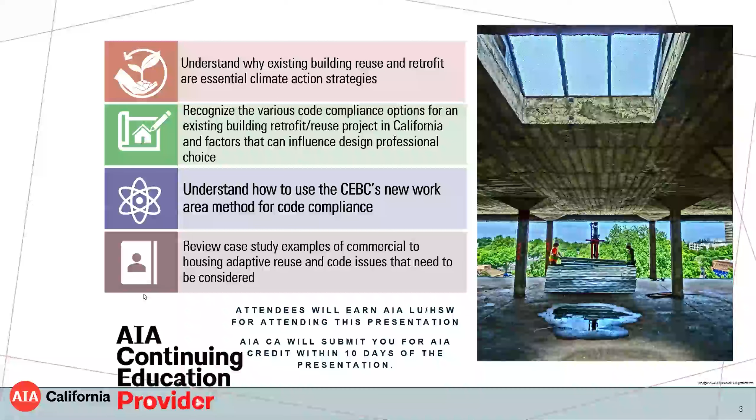Not that I focus just on code, but I've always gotten into the code, and it's kind of exciting to be part of the code development process in the state of California. Sarah mentioned this program will qualify for HSW, and what we're going to do is just talk about buildings and how to intersect the use of existing buildings with code, including some case studies, examples, and I am going to put a particular focus on a brand new approach to the code.

The code is organized, as you all know, to work with by topic, and Ron takes a different view and organizes code issues by the sequence that an architect uses in the creation of design for a building. So it's quite a unique book.

But before I get into the details of the code, I thought this is where a really important conversation starts, the why. And here it's why existing buildings? Why all this attention on existing buildings? Well, they're all around us, obviously, and they do need work.

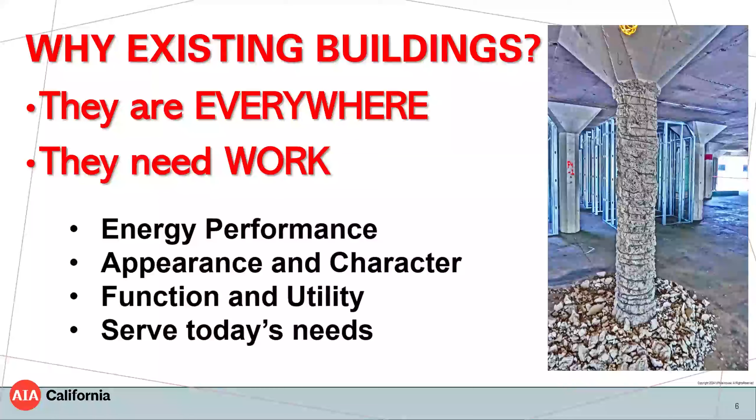They need upgraded energy performance. They often need better appearance and character. And they need to actually serve us for our needs today. We are tearing down a lot of buildings in the United States, 1 billion square feet a year. Oh my gosh. And we have millions of buildings sitting empty.

Meanwhile, the practice of architecture has actually shifted, and we have recently, based on AIA surveys, now crossed the threshold where architects do more renovation work than work on new buildings. And when you look at climate action and our goals and the dates that we're trying to reach, some reduction in greenhouse gases will be significant in preserving our climate as a place for humans to occupy this planet.

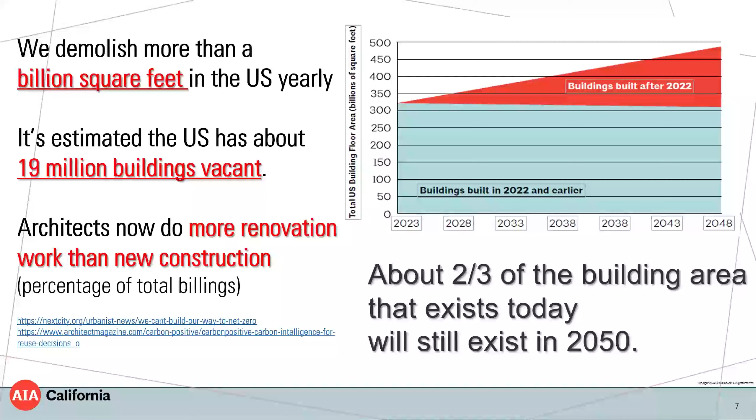The building area that exists today mostly will still exist in 2050. So we have an awful lot of buildings that are unavoidable. Many of you have heard a phrase that Carl Elefante, former AIA president, is widely credited with coming up with, that the greenest building is the one that already exists.

And what that means when you look at what's happening in terms of our climate and the urgency for action, this chart here really shows dramatically how things are changing, and this even more so because this is just from a few weeks ago in our own area, California, where on the 22nd of July, we broke the record for the hottest day on the planet.

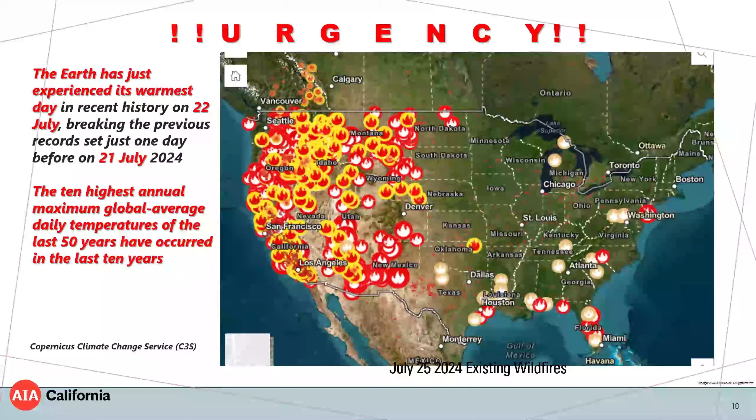And one day before, that was a record-breaking hottest day on the planet. So we're in a situation where there's a crisis and new buildings cannot get us out of this crisis. It's really not possible because we have so many existing buildings. When we tear them down, the embodied carbon emissions from tearing down buildings cannot be recovered for decades.

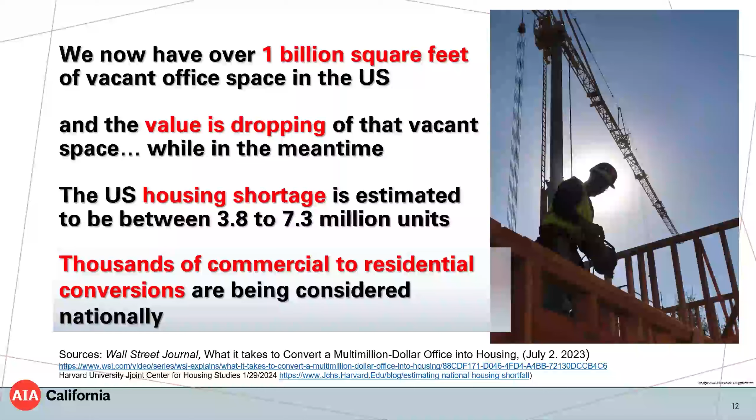At the same time we have this climate crisis unfolding, we have other crises in California and across the country. We have over a billion square feet of vacant office space in the United States, and the value of those buildings is declining. Meantime, we have a housing shortage of millions of units. There's different people coming up with different numbers, but it is millions and millions of needed housing units. And you look at those two things together and they kind of intersect: hey, can't we take some of these underused and empty commercial buildings and make residential uses out of them?

And while those conversations are going on, in the meantime, those of you who are members of AIA know that the whole perspective on our codes has shifted. This Blue Ribbon report that came out in 2019 realized that we have to elevate our thinking about codes as not just preventing buildings from burning and from falling down. We have to consider how they affect the human condition and how they affect the environment. And that new version and vision for codes has been very influential in AIA California, where we have actually brought forward the very first embodied carbon mandatory measures in the United States.

And they're actually in effect right now. They went into effect in July this year. This was a huge four-year effort, just like the changes to the existing building code. And I was proud to play a role in making both of these major code changes. If you looked at the details of how these embodied carbon reduction measures apply, there is a big emphasis on reusing our existing buildings.

So let's take this kind of soup, this mix of issues, all of which are occurring at the same time, and try and pull some multidimensional solutions together, because given the number of issues we face as a state, we do have to look at it multidimensionally.

So let's look at the options for a real project. I assume many on this call are architects working on real buildings, so what are your choices? Many of you may know these already, but I'm going to cover the full landscape.

You have the California Building Code and the California Residential Code for certain kinds of projects: 1 to 2 dwelling units, townhouses, live-work, lodging. You have the Historic Building Code, which works in conjunction with the CEBC. And you have the California Existing Building Code.

That code has 3 different compliance paths you can choose from, 2 of which have been in place since that code came out. Many of you know that the California Existing Building Code used to be in the California Building Code as Chapter 34. It split off a number of years ago to be a separate freestanding code. 2 of those methods have been in the California Existing Building Code from the beginning. Another one is brand new.

That's the work area method. We're going to talk about all these different approaches here today, some of them a little bit and some of them in more depth.

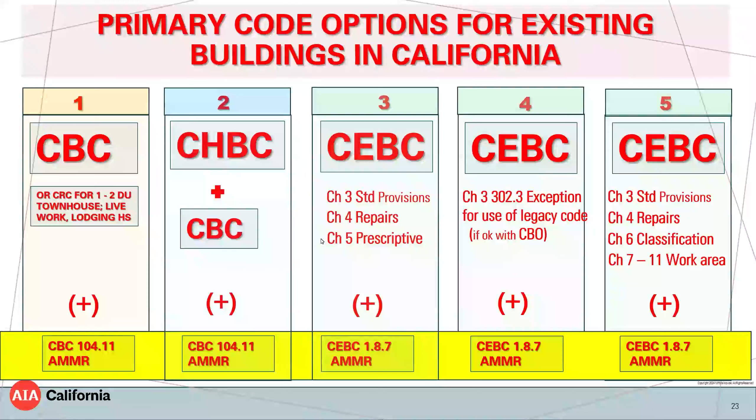Now you notice on the bottom of my little chart here, I say plus AMMR. AMMRs exist as a potential in all of the California codes. Some may not know what I mean when I say AMMR. AMMR is an alternate materials and methods request. It's like a performance code provision in these codes, which are essentially prescriptive codes.

And AMMR, in terms of its structure, has 3 parts. First, what does the code say you're supposed to do? Second, what is the intent of that provision? And third, how does your proposed design accomplish that intent, even though it may not meet the letter of the code itself? For those of you who want more background, all these links are going to be available.

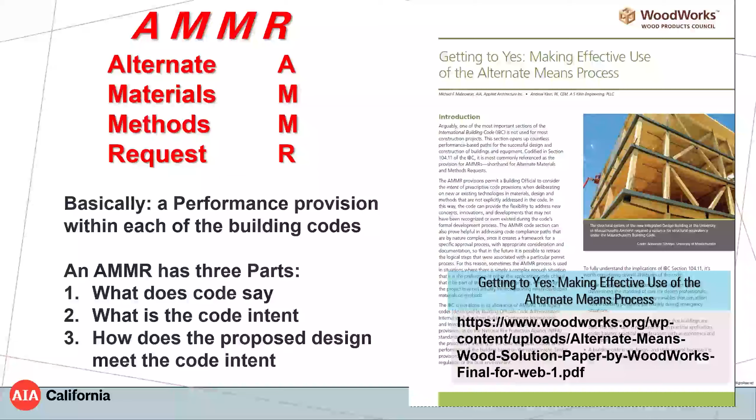As a separate document that's going to be shared with attendees or made available as a link that you can follow up, and Sarah may post it in the chat. But don't worry about copying down these links. This is a white paper that I helped write about using the AMMR process.

Now, I mentioned the existing building code. When you look at the existing building code at the national level, there's a whole chapter that's a performance code chapter in the IEBC, and it creates an entirely different code compliance path.

Now, here in California, that chapter has not been published or adopted until July of this year. As part of our major progress in the intervening cycle, thanks to the hard work of the State Fire Marshal and a lot of volunteers and different agencies, this is now published in California, but not adopted. It is available for adoption in local jurisdictions. I know of one that's potentially thinking about it, but it's a pretty complicated chapter.

Those of you who know the material, because it used to be in California codes, published and not adopted in Chapter 34 - this is unique. It's a unique code because it's based on a point system.

So it tries to bring an objective foundation to how you evaluate life safety. You analyze a building using Chapter 13, and for deficiencies you assign negative points, then you get positive points to balance the negative by life safety enhancements. You have to meet a score that's in a table over 23 measures. By the way, in my slide deck, when you see this little bullseye, that's kind of what I think is a special point.

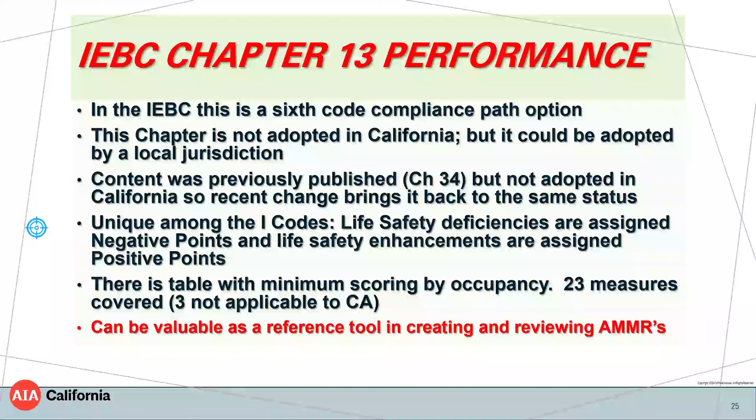In the point system in Chapter 13, it really only covers 3 categories: fire safety, egress, and general safety. So the rest of the kinds of issues that you have to deal with in a building are covered by other codes or other parts of the existing building code. Again, we don't have this available yet in California, but it is available for local adoption, and it's certainly available for reference.

I looked at these numbers and they didn't make sense to me. So I inquired at the ICC and was informed that I would have to talk to the people on the committee that developed this table. That was done so long ago that it's been in place for decades, and so far I haven't gotten any explanation.

The way points are assigned, both negative and positive, there's a lot of variables based on the occupancy. So what I'm warning you is, do not argue to your code official that because the B occupancy for means of egress requires 40 points, it means it has a higher requirement than R occupancy, which has 38. You can't use it that way, unfortunately. It would be great if you could, but you can't.

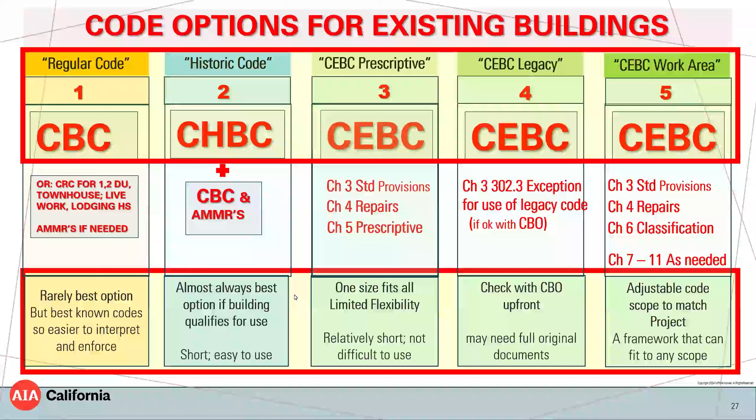And frankly, it's going to get better because that code development committee has just been rebooted, and I believe it's going to even improve more and be more effective.

Then you have the California Existing Building Code. Now you see that listed in 3 columns, because that code, again unique among codes, gives you a choice. I have to tell you the story. When we were in the process of getting the work area method brought to California, which was a 4-year effort, because it involves 6 chapters, how do you bring 6 chapters all in one fell swoop to a code through the typical code development process? Not an easy lift. And unfortunately, they all had to be brought in at the same time because it requires all 6 of those chapters to be functional.

One of the concerns raised to me along the way was from an architect who said, Mike, why are you going to add another code book to my shelf? It just makes it more complicated for us. I told them, you're misunderstanding. These are choices. And guess who gets to make the choice of which of these compliance paths, 3, 4, or 5, you're going to use on a particular project? You, the architect, chooses, not the building official, not the building owner. The architect chooses. And if you choose number 3, then you're not worrying about 4 or 5. If you choose number 5, you're not worrying about 3 or 4. Although the way the chapters are written, there are chapters that apply no matter what you do.

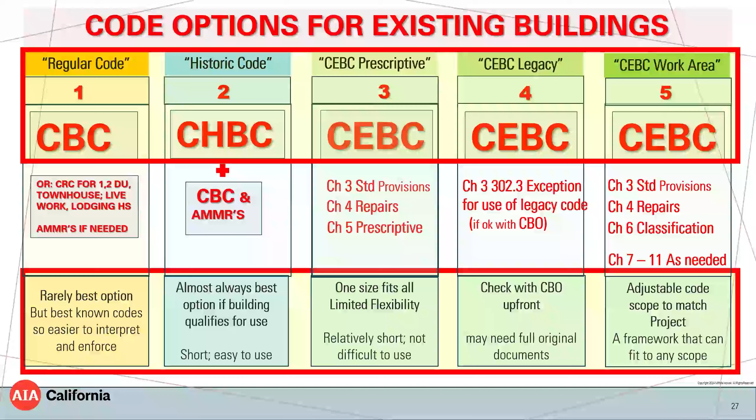I'm going to talk about all 3 of these. But first, let me start at the beginning, the California Building Code.

I just want to make sure you know that it says you can use this code for replacement, repair, enlargement, alteration of existing buildings. If you're taking a project that involves an existing building that you are totally gutting - taking the skin off, gutting the contents, just left with the structural framework - well, you might as well use the California Building Code because everything in that building is literally going to be new and the structure is readily accessible. There may be structural issues that you cannot resolve easily, but there are times when there's not going to be a huge difference, though it's pretty rare, I think.

Now, I've mentioned the California Residential Code. You know that its language also says it can be used for alterations. Usually that code only allows use for 1 and 2 family dwellings and townhouses, not more than 3 stories in height. But California Building Code says the live work units can use the California Residential Code.

And I can tell you one major jurisdiction, the city of LA, is really making great use of this live work provision. They have a whole chapter in their municipal code. For those of you who don't live in LA, sorry, you don't get to use this, but chapter 85 has some really great stuff in it. And it's being revisited now - it's the adaptive reuse ordinance that's under what they're calling version 2.

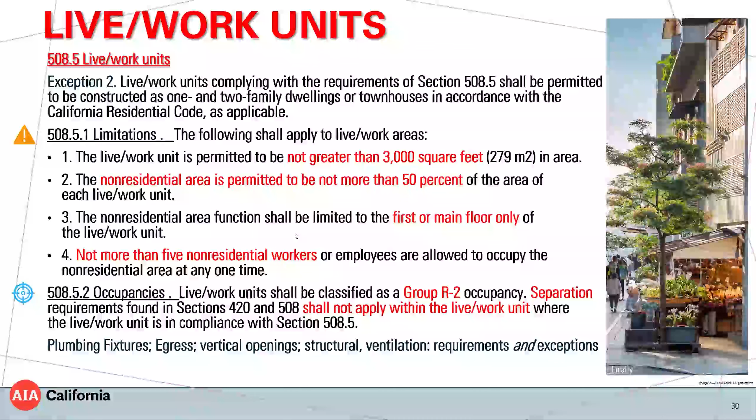It allows you to use the CRC, but then it says that you need to classify it as a group R2 occupancy, which normally isn't covered by the residential code. But you don't have to put in separations - there are some other things covered by that. And again, in the city of LA, they've really taken this to a very high level.

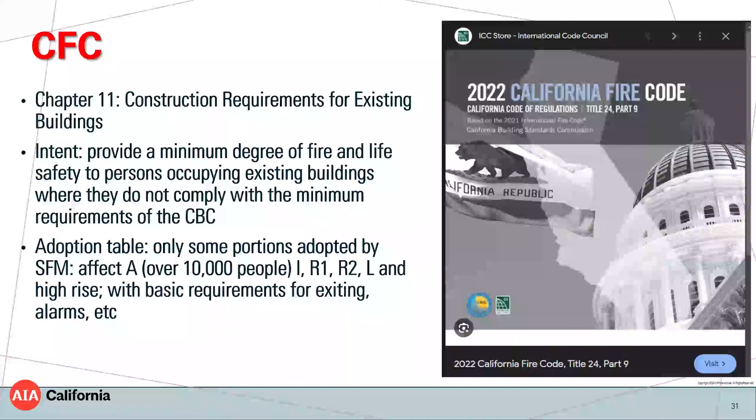California Fire Code is not necessarily a code that architects spend a lot of time with. It is the only code that really applies to existing buildings - Chapter 11. The inspections that fire departments do of an existing building, they're looking for things in Chapter 11. The adoption table is important here because this chapter only affects certain kinds of occupancies - R1, R2, A occupancies over 10,000 people, high rises - and it has basic requirements similar to what's in the housing law.

Let's move now to the California State Historic Building Code. This code is used for qualified historic buildings. Now, what is a qualified historic building? That's a building, and there's a definition in there - it's a subset of all buildings.

It is used at the discretion of the owner, and for design professionals, that means it's up to you. In other words, the use of this code has to be opted into by the design professional. So you have to identify its use on your construction documents, make it really clear in your code analysis - this is the code you're referencing. If you opt to use it, the state agencies and the local jurisdiction have to accept it.

It is easy to understand and apply. It's written in a conversational style that many will find like, oh wow, this is a code I can actually sit down and read - which unfortunately means that there can be variations in how it's interpreted by local jurisdictions. I'm going to tell you, though, that this code has a unique element in it that can overcome this variation in local interpretation. Like in any code, whenever I'm looking at a code, I always check the definitions.

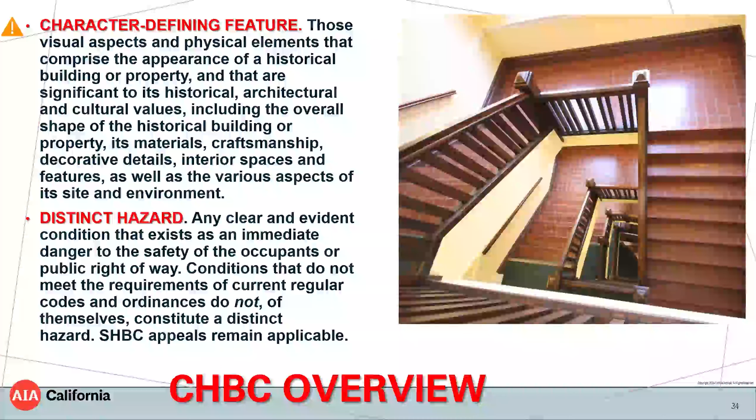This is a major issue, and it clarifies in the code that just because something doesn't meet regular current code, or doesn't meet a local ordinance, that does not itself mean something is a distinct hazard. That's an appealable determination as well, and I'm going to show you how that works in just a minute.

The CHBC is applicable to all issues regarding code compliance, but what's unique about it is it's not a complete code by itself—it has to be used in conjunction with the regular code, the California Building Code. There is a mandate that it be used by agencies whenever it's the code selected by the design professional, the owner, and the building qualifies.

It does allow buildings to be expanded, with non-historical expansion or addition, when those conform to the requirements of the regular code. They also cannot detract from the historic substance of the building. In other words, you can't wreck a building with an addition to make it non-historic, which makes sense.

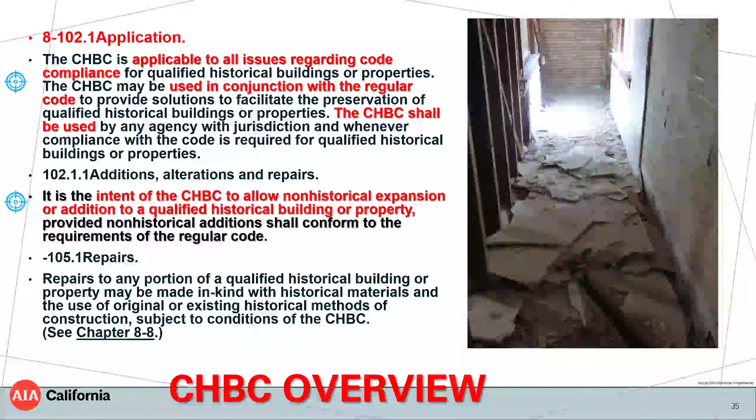Repairs can be in kind. That can be a little tricky to navigate, as many practicing architects know, because materials might not be available, or they may have changed—like the dimension of a 2x4 has changed significantly over the years. So one made today is not necessarily going to be the same strength as one cut in 1930, but these are things that can be overcome.

Building use can remain regardless of the time when it's been unoccupied. Some people think there's a rule of thumb that if a building is abandoned and empty for 40 years, it loses its ability to reestablish the original use. That's not true—that's written right in the code.

Changes of occupancy do not mandate conformance with new construction. That's a big one for architects, and it's stated as clearly as I've put it here. Check it out, 8-302.2—a really great tool, especially for the kind of project that AIA California is very excited about: commercial to housing adaptive reuse.

Some of the other cool things in this feature: you're unlimited in floor area. Once you sprinkler a building, most of the required separations get either omitted or can be reduced to one hour, and many can simply be omitted due to the fire sprinkler, the active fire protection.

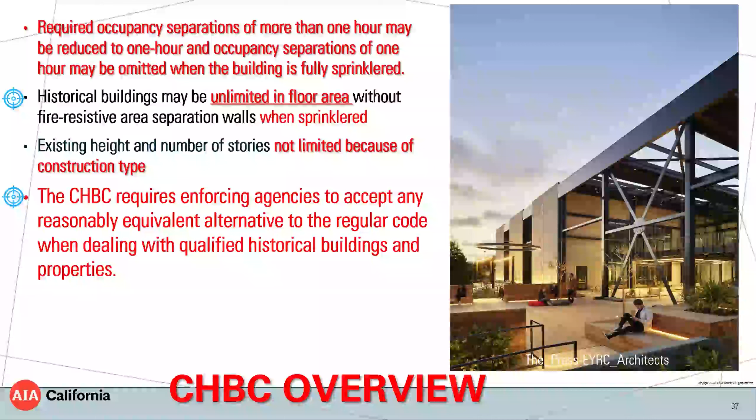You're not limited in terms of construction type to any particular height or number of stories, because if a building was built and it's been that way, it can remain so. There's a statement that the CHBC requires enforcing agencies to accept any reasonable equivalent alternative to the regular code. I mean, how great is that?

The way structure is dealt with in this code allows you to use a lower factor - this 3/4 factor in checking wind and lateral loads historically. You can also use this assumed adequacy when you have gravity loads that you can demonstrate have a complete load path and there's no evidence of distress. So the test of time has merit in terms of applying the historic code for gravity.

Those of you who are new to this code, I highly encourage you to go to the Department of General Services, Division of the State Architect resources page. DSA is sort of the custodian of this code, and they manage the code committee that adopts and maintains it.

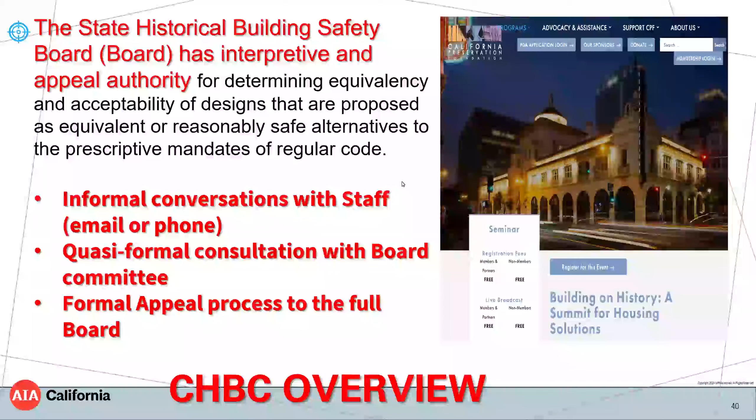Okay, we're going to change gears now and talk about a different code. Remember when I said there were 5 different approaches? We've talked about 2 of them. The other 3 all come from the California Existing Building Code.

One of the 3 paths is brand new - it's the work area method, effective as of just a few weeks ago, July of this year. That's due to a concerted effort undertaken on behalf of AIA California, involving a lot of people from all over the state, code experts, fire officials and building officials from up and down the state. Very proud of the progress we made bringing this to the table.

The philosophy of the California Existing Building Code now follows the logic used to create the International Existing Building Code - a progression of code compliance that becomes more strict as a project moves between different levels. It goes from repair, to 3 levels of alteration which I'll describe - this is a little confusing - to change of use and additions. By the time you get to additions, pretty much, not 100%, but pretty much meet current code.

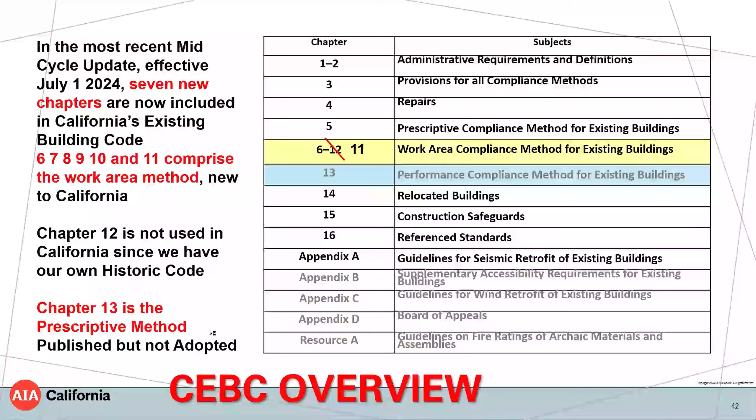That's the point when my presentation crashes - apologies for that. I don't know why it was doing that earlier, but I'm going to have to go back to where I was, which is this slide right here. Sorry about that.

So if you look at the California Existing Building Code from the table of contents standpoint, you find it has a bunch of chapters in it. Chapter 12 is not adopted in California - we have a whole separate Historic Building Code, which is what I've been talking about for the last 15 or 20 minutes. Chapter 13 I have in orange because it's printed but not adopted - it is very useful as a reference. You have the prescriptive compliance path that's been in place in California since this code became part of our code landscape.

That still exists, but now we have this additional work area. Now I drew a yellow line.

Every project is going to involve chapters 1, 2, and 3. Anytime you have a project using the California Existing Building Code, you are going to be using chapters 1, 2, and 3. Most projects, no matter which compliance path you use, are going to be using chapter 4. Chapter 5 is only used if you choose the prescriptive compliance path, and chapters 6 through 11 are only applicable if you use the work area compliance path. And which of those chapters is applicable depends on what exactly you're doing in your project.

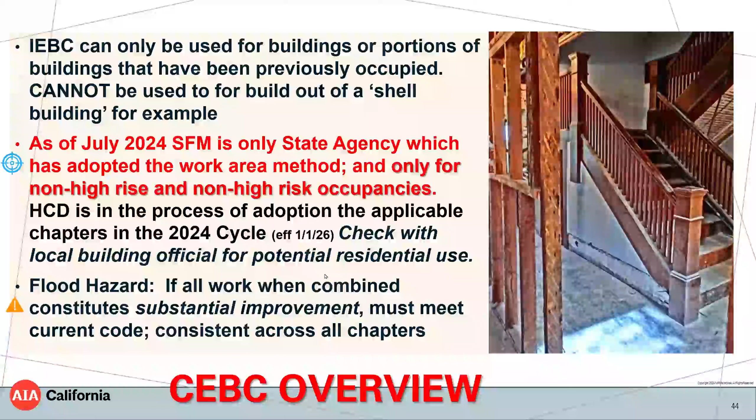The other thing I'm noting here, and I have a little triangle with the exclamation point, flood hazard. Flood hazard requirements are the same no matter what compliance approach you use. And when you do substantial improvements, you must meet the flood level elevation for the area. That's consistent across all chapters, and that's basically meeting current code. So be careful if you're in a flood hazard area, because those standards do not depend on what compliance path you choose.

So as I mentioned, all projects are going to use chapters 1, 2, and 3. Most projects are also going to use chapter 4, because most projects involving an existing building have some degree of repair. And you don't have to cite repairs in your code analysis necessarily, although I do think it's helpful to a code official if you make it clear, and you can do that with a narrative scope.

One reason to do that is because, as you'll see as we get into the details here, those provisions are pretty loose, pretty flexible, and pretty workable, pretty easy to understand as well, and pretty easy to apply, with a couple of rubs that you might get into that I'll mention, like dimensional lumber being different, so you may have to show that the lumber you're using has equivalent strength to the lumber that was used historically.

So let's talk about chapter 1. That's the basic nuts and bolts that define the scope. So what is this code for?

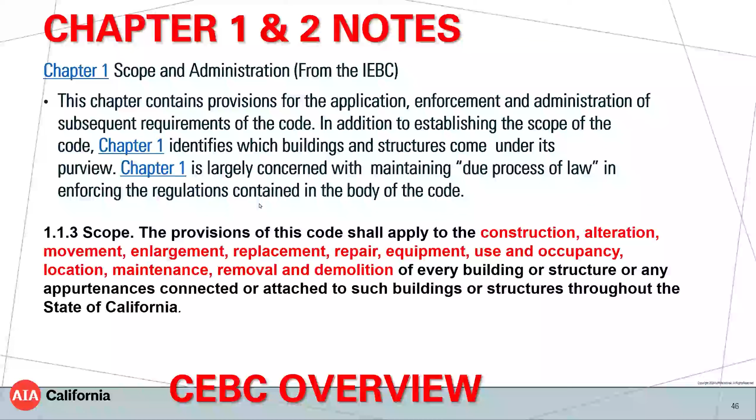And this isn't a chapter most architects are going to spend much time with. It's about the due process of law. But like all the codes in California, the adoption tables are part of the code landscape.

And I know most architects, many building officials cringe over the adoption tables because it's this alphabet soup of state agencies and different adoptions. And what you find is state agency adoption process can lead to different language for the exact same issue. Now, here's an example from the adopted California Existing Building Code.

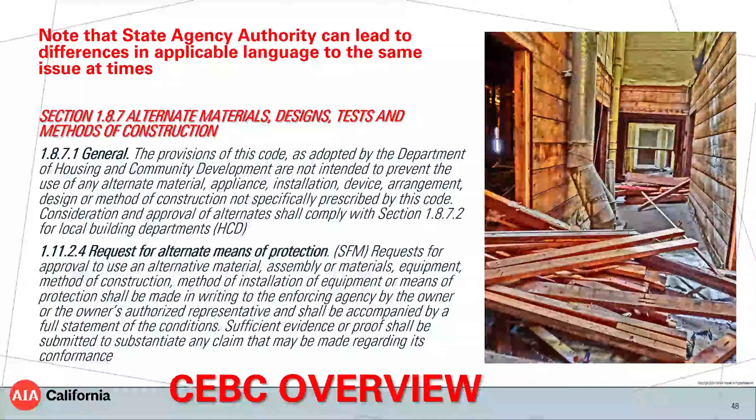One adoption by HCD and one adoption by SFM. They're pretty much exactly the same in terms of the outcome. Why do they use different words? I'm not sure. Maybe there's some logic there. Maybe that's just how it played out. It just creates baggage when the same thing is accomplished with different words.

It makes the code bulkier. Hopefully at some point there is some effort to do some cleanup, but everybody's busy all the time, also in the state agencies. So unless a topic comes up as part of an adoption, making the code more lean and easy to use usually isn't necessarily a main driver of code change. I like this one. So here's a few things that I think are cool for architects.

104.2.2 basically tells the code official shall meet with the permit applicant prior to the application for certain kinds of work. This doesn't say may meet or could meet or hopefully will meet. It says they shall meet. It is a mandate. Now many building officials want to meet with you early in the process, and really smart building departments, in my view, offer pre-development meetings at no cost because it saves everyone, including the building department, time and money.

But there are not any equivalent requirements that I'm aware of in other codes, and I would encourage architects to take advantage of this. If you ever get pushback, say hey, check out 104.2.2. You have to meet with me, unless it's just a repair or level 1 alteration. Those projects, I guess, are considered simple enough. They're beneath the mandate of this clause.

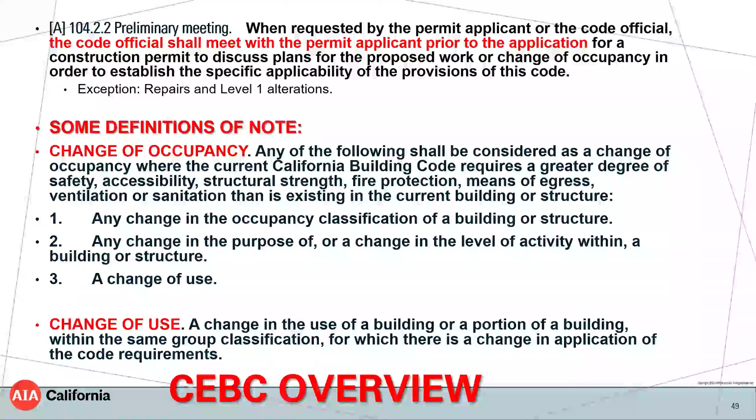Change of occupancy. What is a change of occupancy? I know you all intuitively know what a change of occupancy is. Unfortunately, it's complicated, more complicated than you think. It's more than just changing what letter and number is assigned to the occupancy by the CEBC. It's about how a building is used, the level of activity, and you may be in the same occupancy classification. So there is a distinction in the California Existing Building Code and in the IEBC between change of occupancy classification versus change of occupancy, which is a much broader envelope. I know it takes a little while to get your head around, but it's a real thing and you need to be aware of it.

It isn't always going to come up, but it can come up. Some other terms that seem like they might have intuitive meaning, but they don't. They have very specific meaning.

What is an incidental structural change? Just remember 5%, 5% is incidental. What's a minor structural change? 10%, 10% is minor. What's a major structural change? Anything that isn't 5 or 10%. If it's 11%, it's major. If it's 22%, it's major. But if you just remember, incidental means 5%, minor means 10%, major is everything else. And those numbers, you'll see them popping up in other places in the code, just like the 75% you already saw in the State Historic Building Code.

Here's a couple other definitions that I thought were important. Substantial. There's a difference between major and substantial. Substantial means the cumulative impact over a 5-year period of alterations that affect the structure's ability to serve its intended purpose. And that's 30%. So substantial is 30% over a longer period of time.

Some may wonder, what is BS here? And it isn't the pejorative BS. Why are these bracketed terms in here? For those of you who aren't aware, that's a reference to the code committee at the I-code level that is assigned to this definition, because each part of the code is assigned to a different committee. Sometimes in the same chapter it's broken up into parts and pieces, and definitions are assigned all over the map. So they're of really little relevance to California unless you're trying to make a code change at the national level. But that's what those mean. Those are not state designations.

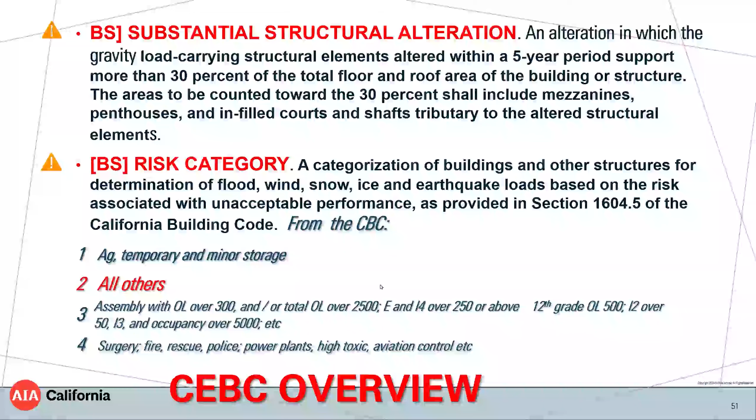Risk category is a very important terminology, and this is based on the CBC section 1604. There are 4 structural risk categories. This is about the category of determination of loads from flood, wind, snow, ice, and earthquake based on unacceptable performance. Almost all buildings are risk category 2. If it's ag, minor storage, or temporary, it's a lower risk category. And if it's high occupancy assembly use, or education, or institutional occupancies, or school occupancies, or surgery, fire, rescue, police, power plants, toxic plants, aviation control, those are higher risk categories. Those are important to know because that's what often triggers the need for a structural upgrade. And fortunately, chapter 16, most buildings are in category 2.

What does technically infeasible mean? Again, I know you all intuitively know what that means, but I'm telling you there's a definition of it, and it's based on structure being in the way of allowing something to happen, or site constraints—like you cannot add a normal second exit because the building is built to the property line on 3 sides, and it's too narrow to meet the requirements for diagonal distance. So maybe there's a constraint that allows you to use a fire escape instead.

It's about things that you cannot change reasonably, like load-bearing members that are essential to the structural frame.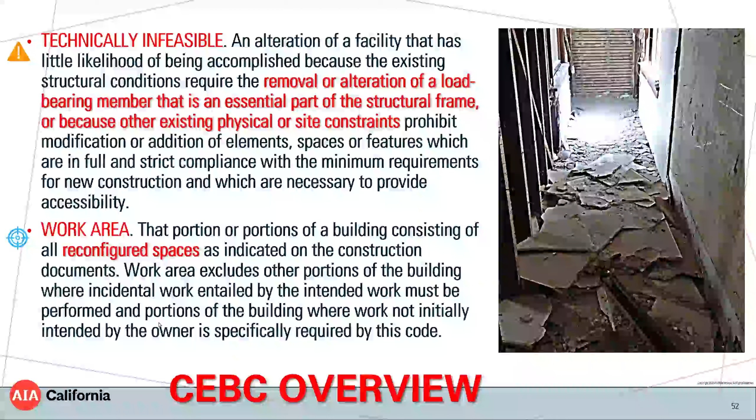Another big term is work area. That's one of the most confusing parts of the International Existing Building Code and the California Existing Building Code, so I'll spend a little more time on it. The written definition is reconfigured spaces as indicated on the construction documents. Yes, architects, you do have to show where the work area is on your plans - it's actually a code requirement. It excludes other portions of the building with incidental work that's triggered, like accessibility, not because an owner is doing something to further their plan for the building, but because of some code trigger. That's the way it's worded: work performed where it was not initially intended by the owner, specifically, and when it's triggered by code.

Give you a breath - I'm taking a breath before we get into chapter 3. We're about halfway through. I know it's a long haul. Hang with me for a minute, we'll get through this together.

Okay, chapter 3 applies to every single project that uses the CEBC. So if you put on your cover sheet that you are using the CEBC, it doesn't matter which compliance path you choose, you need to look at chapter 3 because it applies to your project. Of note: you cannot mix compliance paths on the same project. You cannot use the work area approach for this story and the prescriptive approach for that story. No, it's one or the other because it's a whole package process.

But there is this weird exception, 301.3. Remember I said at the beginning there were 3 compliance paths? This exception is viewed by the ICC and the experts on the existing building code, and referenced in all the code materials, as a compliance path. What this exception says is alterations can comply with the laws in existence at the time the building was built. If you make alterations conforming to those laws, they comply with the code. If you put in new structural members, they need to comply with current code. But when you replace a structural member or make alterations, you can use the laws in existence at the time the building was built. Now, what this also says is it's subject to the approval of the code official.

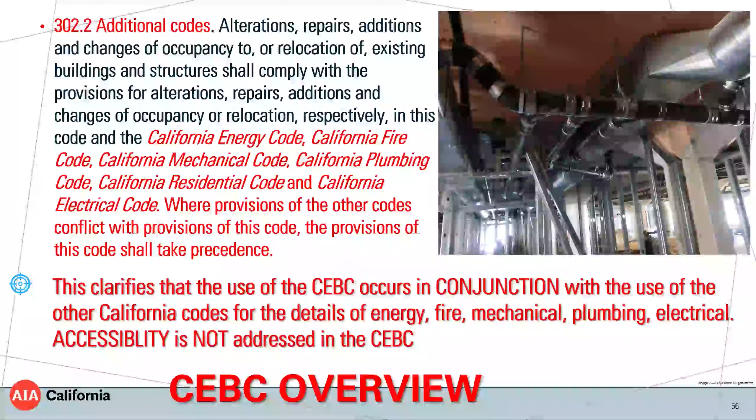This just clarifies that those parts and pieces form the whole. Existing materials are covered in 302.3. You can leave them in place unless they're unsafe. So if you have glass that's not tempered and it's a hazard, the code official can still ask you to replace that, even though it was put in originally. But most things do not fall into the category of being a hazard.

New and replacement materials: you are permitted to use the requirements of new code, and you can use materials that are the same as what was done originally, provided you don't create an unsafe condition. And you can't use hazardous materials where the new code would not permit their use. Safety glazing is one example.

I mentioned, you may find that when you're doing a fire repair, your code plan reviewer says, hey, you can't replace a 2x4 with a 2x4 because these 2x4s from 1920 are not the same as 2x4s from 2024. It's true. So you may have to either make the size larger, or do an analysis to show what an equivalency is.

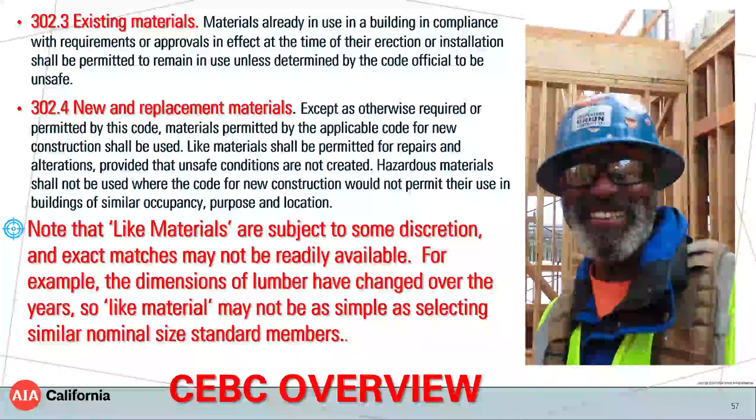And again, that doesn't always get raised. It can get raised if something looks pretty sketchy. It can also get raised as a matter of course. It's going to depend on the plan review. I have had that question brought up.

Section 304 talks about loads. If your project does not increase the design live load, the existing gravity structural elements can be designed for the live loads that were part of the building's original design. So you can actually go back and see what was permitted and continue to use those loads. If you do increase the live loads, then you have to account for that according to the regular code.

This potential to inherit a vintage live load, if you don't change the loading, is important because it can allow you to leave a lot of the structure intact. When you look at really old buildings—some examples I'll show later—like a concrete building built in 1915, the floor was reinforced with wire mesh unlike anything you'd see in the marketplace today. It was strung like in a shallow parabolic curve.

How do you evaluate some of the materials that were used? But again, if it's been carrying the load, it was a storage occupancy. The original loading design was for 100 pounds per square foot. So that building can continue to carry 100 pounds per square foot as long as the floors are not showing evidence of distress, just like the state historic building code allows you to inherit finished live loads as well.

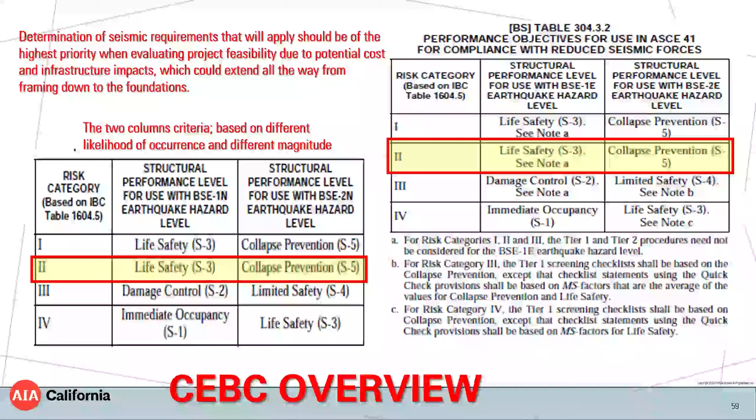Determinations of what seismic requirements are going to have a big impact on project feasibility, so this is something that has to be looked at early. The requirements are based on two sets of criteria and two different kinds of events: a bigger event that's less likely to happen, and a smaller event that's more likely to happen. Each of these has to meet a different level of requirements.

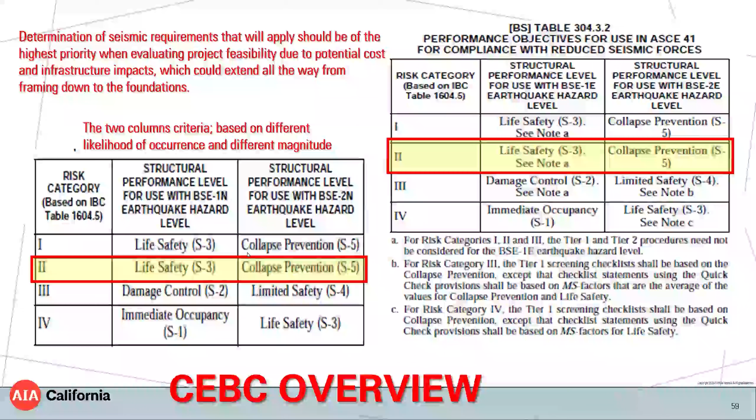So you have this BSE-1E event, and you have a BSE-2E event. This event needs to meet a structural performance of collapse prevention. This event needs to meet a structural performance of life safety, S3. S4 is not used—they skip it here unless you're in risk category 3, which references S4, a higher risk category. Most buildings, again, are in risk category 2. You note that risk category 1 and 2 have the same performance requirements, even though they're different risk categories.

When you're working with existing buildings, you get to use that 75% of new load provision found in the state historic building code, and that's a big help. I am told by engineers that they have to check both of these, and sometimes one controls and sometimes another, just like with lateral loads, sometimes wind controls, sometimes seismic. The basic idea is you have an event with a 10% probability in 50 years, and another event that's 2% probability in 50 years, and they are different magnitude.

You also have things triggered, like bracing masonry parapets. You have a cantilever, unreinforced masonry wall. Those things have to be upgraded, and many architects and engineers will want to do those things whether or not there's a specific code trigger, just because they're such high hazard - they affect the public because these elements fall into the street. They're relatively easy to fix.

Section 317 requires seismic evaluation and retrofit for state-owned structures. Just a warning, some local building departments have adopted these. The city of Sacramento, where I do most of my work, has adopted these to apply to privately owned buildings. This clause is a major deal. It has 5 triggers: a construction cost trigger, a change in risk category trigger, a modification to structural elements trigger, a structural item disrepair trigger, and a change in design loading trigger.

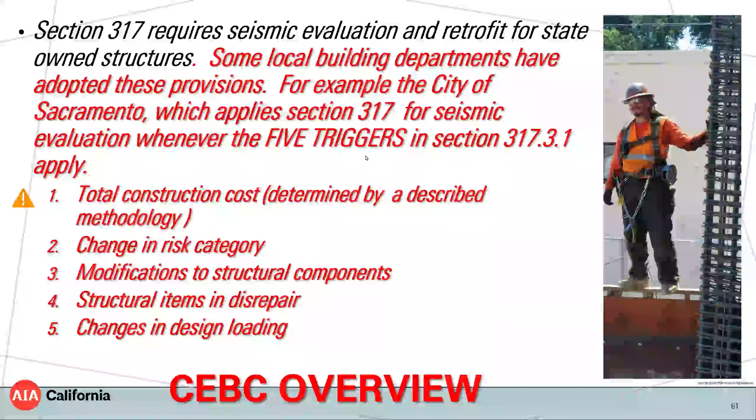Your community may not have adopted this. I hope that at some point the city of Sacramento rethinks its adoption of it, because it's a pretty onerous set of standards. And it is not part of state code, other than for state-owned buildings.

Section 317 - I point out here that let's say you do the analysis and you find out that the building doesn't conform, which, as I said, is going to be the case for any building that's a decade or more old, probably. Again, I'm not a structural engineer, but that's what I'm told by structural engineers.

There's actually 2 outcomes of that for the project. One is fix it. The other one, interestingly, is provide a plan. The plan has to be acceptable to the building official, and the retrofit has to happen in a timely manner. Timely is a term not defined in the code, and that's up to the building official. But that can be really helpful.

You may have a project where it lends itself to phasing. Maybe there's some future activity that's going to allow better access to the parts of the building that have to be accessed to perform the upgrade, or maybe it's a temporary use. But anyway, it's 2 things that are defined as appropriate steps.

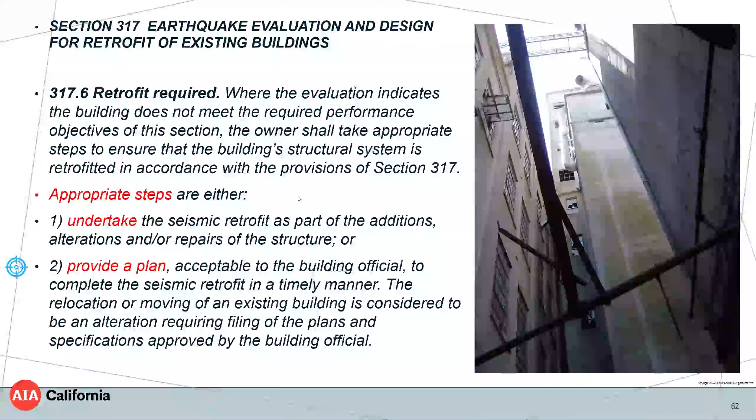Now let's go to chapter 4. Are you guys all still with me? We've kind of moved into the home stretch here, so hang in there. By the way, there's a reduced size version of this presentation that will be available. I don't think anybody wants to go through all 150 slides or whatever this whole deck is, so I picked the best decks. You don't need to write stuff down, you're going to get the key things. Tables and that sort of thing will be made available to you. You just have to email the AIA to get a link.

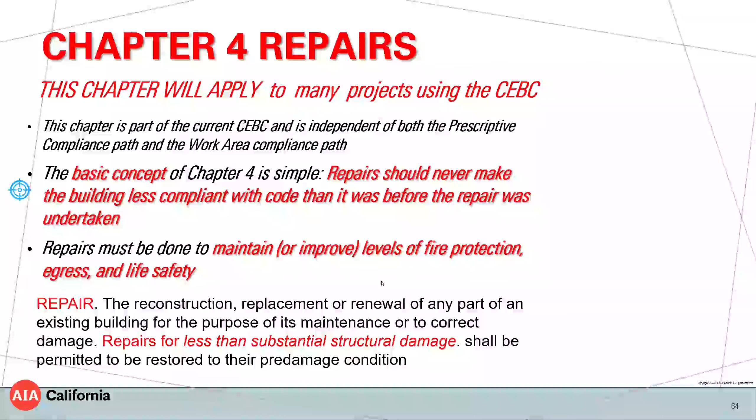And you can, for repairs, go back to the pre-damage condition when the repair is for less than substantial structural damage. You just go back to the way it was before. And remember, that's a defined term, right? Remember I flagged that earlier? So if you're in a case like this, where the structure is part of the beauty and the character of the room, that's pretty darn important, right?

I'm not going to talk a lot about chapter 5 because that's been in the code, and actually one of my friends who's an architect, but far more of a code expert than I am - that's pretty much his thing, he's an in-house code consultant for an architectural firm - he said, Mike, I've gone through the work area method and the prescriptive method. I'm not seeing a lot of difference in the outcome. There is a little bit, but not much.

So whatever you've been able to do under the prescriptive method, you'll be able to do that under the work area method. You're going to have more latitude though in terms of how far that work scope is going to extend, in terms of how much of the building you have to touch, and there are some other things that you may not have to do at all.

Chapter 5 was adopted, I believe, by California because it's pretty simple. Everything's in one chapter, and they just have sections of that one chapter to talk about things like change of occupancy, windows and emergency escape, fire escapes, alterations.

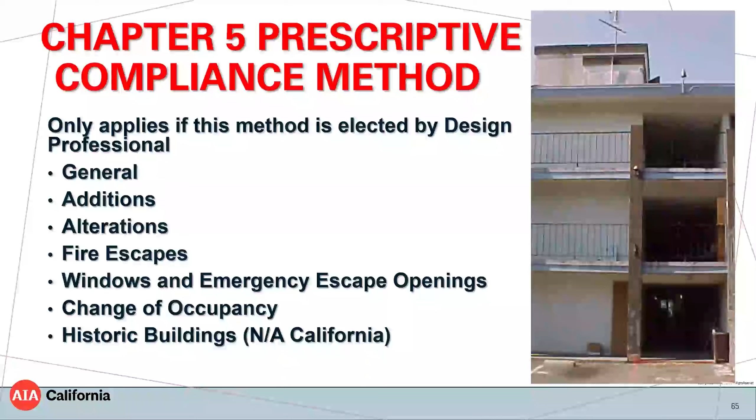You elect this method. As of July, you probably didn't have to say I want to use the prescriptive method - it was really the only method other than that one unusual exception method that's rarely used. Most aren't even aware that it exists. Now you're going to really have to say, yeah, I'm going to use prescriptive. If you know this and you want to continue using it, it hasn't changed at all.

One of the things you'll notice in the prescriptive chapter, that's also in the work area method, is this weird paragraph. When I first saw this, I thought, what the heck is this saying? If you put in a sprinkler system, you can use the current code for fire resistance ratings, but the code official can require you to provide this extensive set of reports and data and investigation to justify using the current code.

Why is this paragraph there? That's because of how codes have evolved over the years. It wasn't that long ago that open offices were kind of a novelty, but as changes have occurred in how we use buildings and the geometry of them, the way the code's used has changed. In California, virtually every building is sprinklered now, and there are things that don't have to be fire rated, like hallways, that used to have to be fire rated as corridors.

So what this is basically saying is, if you fire sprinkler, some of the things that were allowed by that fire sprinklering maybe were code variations or some other - maybe they were put in for some particular reason that you need to understand before.

Anyway, it's rarely used and it's confusing. I have a feeling that most code officials do not ask for all that detailed analysis. Most fire marshals are so happy to see a fire sprinkler building, they're not going to burden you with a whole bunch of study and analysis and code research and documentation. But just be aware that clause is in there in case it comes up.

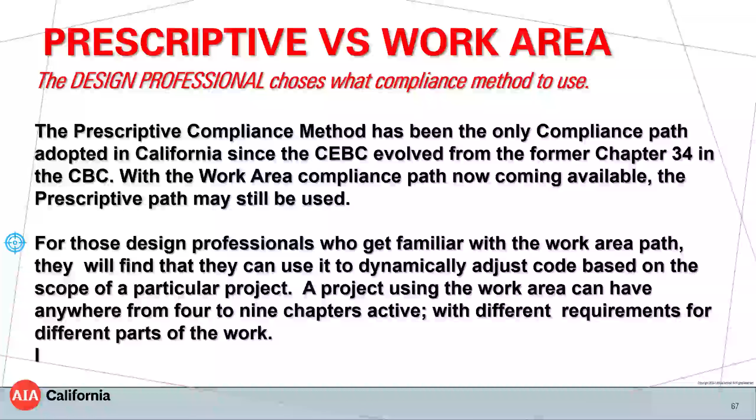As I mentioned, those of you who know the prescriptive method and want to continue using it, go right ahead. It's still there, hasn't changed at all. But I'm going to spend time now talking about the work area method because that's brand new.

It tells you where to go for the rest of your requirements. If you don't start in chapter 6, you don't know which of these other parts and pieces are applicable to your project. And you've already gone through chapter 3 - remember, that applies to every project. So it's just kind of a layering thing that's going on here.

Every project triggers chapter 3 requirements. Then when you get into the work area method, every project has to go through chapter 6, because that tells you what of the other chapters apply to your particular project.

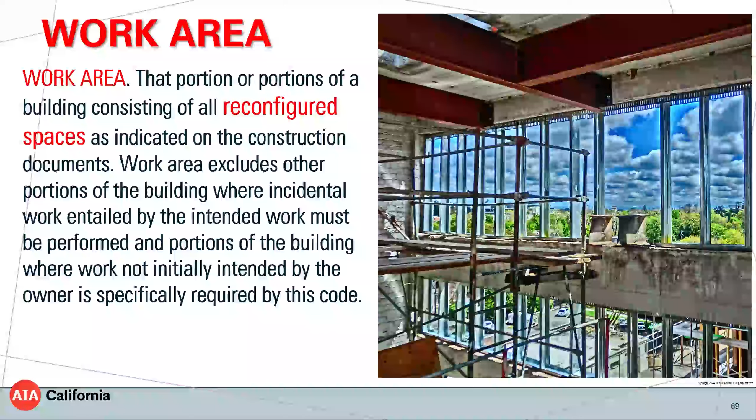So the first thing you have to understand in using the work area method is: what is work area? I already showed you this definition, but that wasn't enough to understand it - I didn't understand it from just reading that definition. And again, this is new to California, so there are people here who know this method, but there are a heck of a lot more who don't, and they look at it and think, what the heck is this chapter all about?

So here's some examples of work scopes and whether or not that work scope involves work area. Just bear with me for a minute - I know that statement sounds confusing.

Let's just say you're doing some repairs - one suite of a building has some new finishes, you're having to do some accessibility work. That's going to trigger chapters 1 to 3. That applies to every single project, so that's a no-brainer. There's some repairs - that applies to most projects.

And this scope of work is a level 1 alteration. Level 1 alterations trigger no work area. I know you're doing work on the building, but work area and work you're doing are not the same thing. Work area is a specific term unique to California and the International Existing Building Code - it has a special meaning, different than the word work.

This scope of work has no work area. So you would not have a diagram on your plans for this scope of work showing a geographic area, part of the project - it's not needed. You could do a narrative of what's a repair and a narrative of the level 1 alterations in your typical notes, with a citation that you're using the work area method of the California Existing Building Code, and you're good to go.

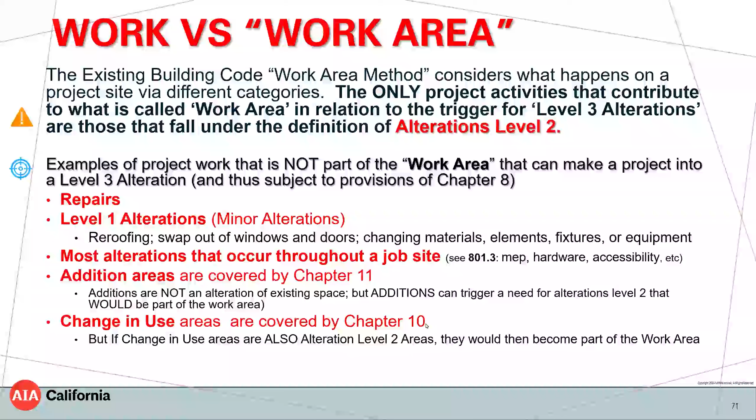Same thing with change of use. The area within which you change use is covered by Chapter 10. If that is all that you're doing and you're not touching the rest of the building, it does not have work area in it. If you are changing the rest of the building, you have to evaluate what you're doing and characterize it as level 1 or level 2. If it's more than 50% level 2, then it becomes level 3.

I hope that helps explain it. I know that's the hardest thing to get your arms around in the work area method is the word work area. And maybe they're using the wrong term - maybe the term should be changed, I don't know. But once you get it, it's like, oh okay, now I understand. I hope that lengthy explanation was good.

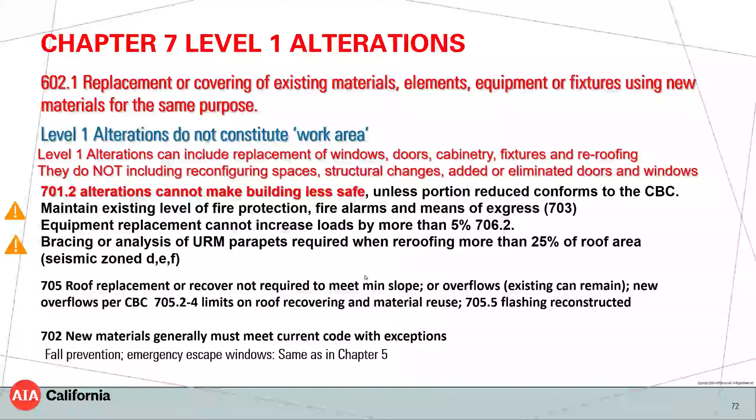When you do roof replacement or recover, you're not required to change the slope of the structure. You're not required to change the overflows. If you do change the overflows, you need to meet the basic code. Same thing if you're reconstructing flashing. New materials typically need to meet new code. Fall prevention and emergency escape windows - there are some latitudes there that allow you to do smaller openings than normal code requires, and those are the same as in Chapter 5.

Now let's talk about level 2 alterations. When you add doors or eliminate doors or windows, when you reconfigure rooms, layouts, now you're triggering level 2 alterations. Installing additional equipment - if you do this type of activity over more than 50% of the total building area, all of the work area becomes a level 3 alteration.

And there are exceptions. It does not apply when your project is limited to one or more of the following: mechanical, electrical, plumbing, fire hazards abatement, window change out, hardware, accessibility upgrades, fixtures, racks, counters, partitions not over 5 feet 9 inches high.

If your work area goes over 50% of an individual floor - up here it's talking about the total building - if it's over 50% of a floor, the standards for that floor apply to the entire floor relative to exiting, door protection, etc.

So there are two triggers there, and that's why I put the little triangles. One is the trigger related to total building area. The other is the trigger when your work area exceeds 50% of any given floor. So you have to be aware of both of those.

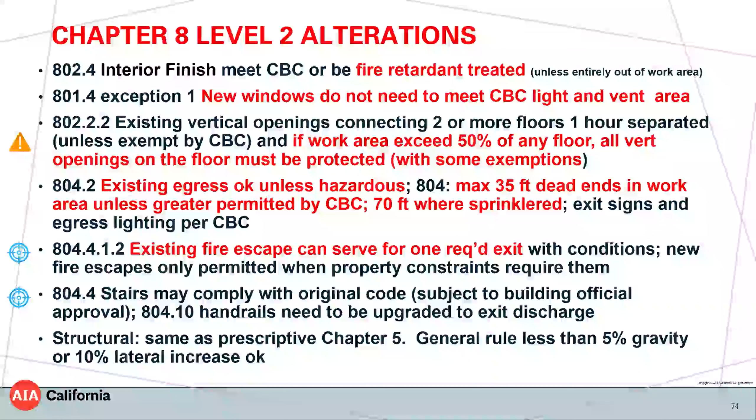General rule: 5% gravity increases are going to be under the radar, and up to 10% lateral increases are under the radar. Now let's go to chapter 9, which is level 3 alterations.

Now the work area, and remember, work area is not the area within which you're working. It is this term, work area, so it really should be in italics here. It exceeds 50% of the building area.

Now you have to take the stair enclosures all the way to the exit, which makes sense. You get into a protected enclosure, you want to be in that enclosure all the way until you get out of the building. That is not a requirement for chapter 8, level 2 alterations, by the way.

Some latitude for fire separation between dwelling units, consistent with existing wall structure. That's in reference to existing lath and plaster. If you're not tearing open the floors, you have some latitude here where you can leave, say, a hallway in an old office building - it may serve as a fire separating element and not require you to tear open the floor. Or if you have a bunch of offices, the walls between them may be allowed to remain without opening the floor if they can serve as the demising walls between your units.

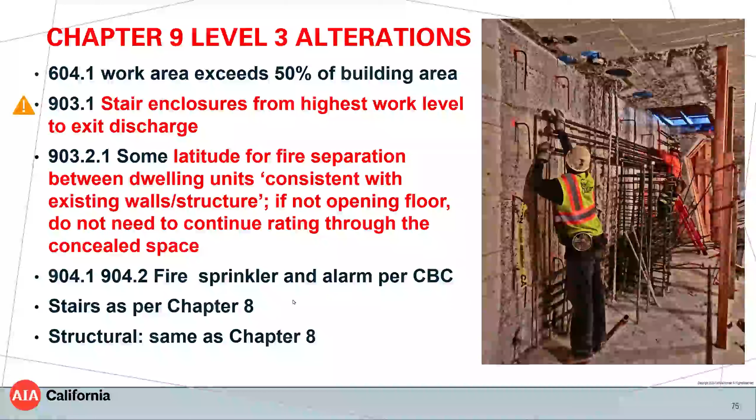Fire sprinkler alarm per current code, as is typical throughout California. Now we get into chapter 10, change of occupancy.

And again, as I mentioned earlier, there is a different set of requirements for change in occupancy classification than for change in the purpose or level of activity. This tells you that when you change the occupancy classification, chapter 9 for level 3 alteration applies, with all the provisions in addition of section 1011, and those address risk level.

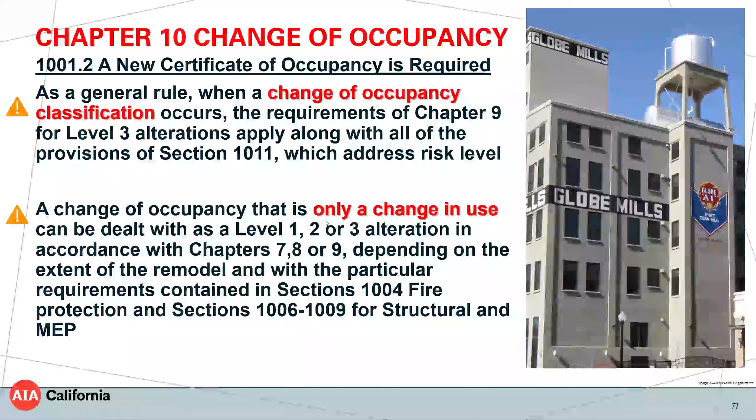If you're only changing the use or the scope of the use, those allow for complying with a different subset of requirements. So this is a higher requirement than that, and they are different. Different triggers and different outcomes.

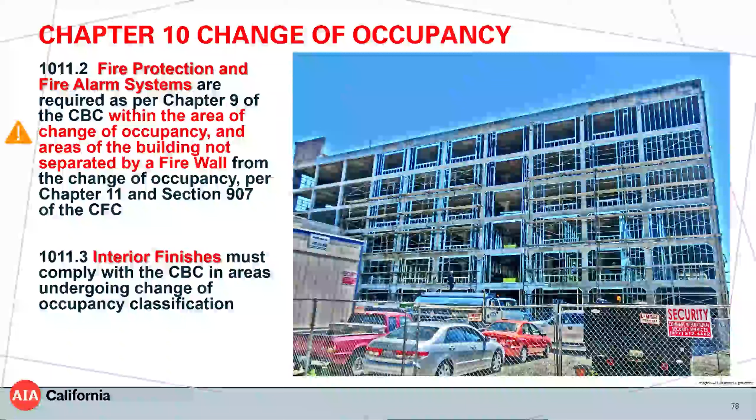You have to do fire protection and alarm system. What the code says: within the area, the change of occupancy and parts of the building not separated by a firewall—there are some provisions that allow for some latitude in what type of firewall. I know firewall is a defined term, and it may not be a firewall as you know it from the current code. Whether that's going to be permitted in your local jurisdiction or not is based on a rather uniform opinion on the part of fire marshals that partial sprinklers are not allowed in California. That's an open conversation, and one that I'm encouraging to occur even relative to the historic code.

Again, this is confusing because this isn't talking about the building and how its characteristics conform to the standards. This is talking about how the building is currently used and what the new use is. How a building is used and how it performs may be different. I think the assumption when this table was created was that buildings are built to the lowest standard allowed by code, and that isn't always the case. Sometimes they're built better. Sometimes a building changes how it's used over time—it's built to one standard and gets used by a lesser requirement. But anyway, this is something that needs to be looked at early in the process.

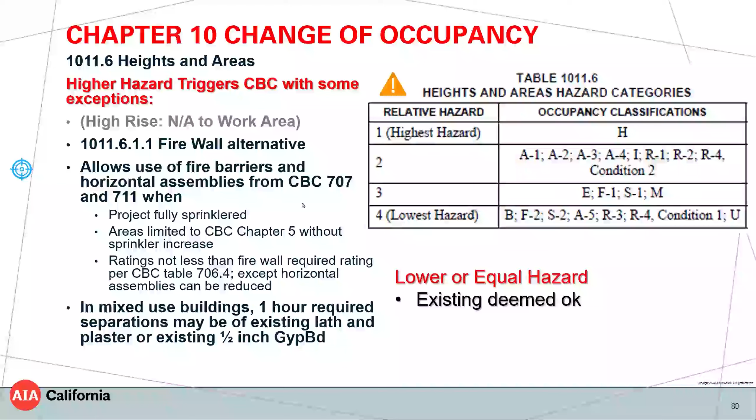There's a similar table for height and area classification—how big can the building be, how high can it be. Lower or equal hazard, existing is deemed okay. If you're increasing hazard, like going from an S1 to an R2, or from a B to an R2, that's considered increasing the hazard. Then you have to look at these requirements: fully sprinklered, areas check, and separation of elements is a way to reduce requirements. It does allow you to meet a 1 hour requirement with historic assemblies, including 1/2-inch regular gypboard.

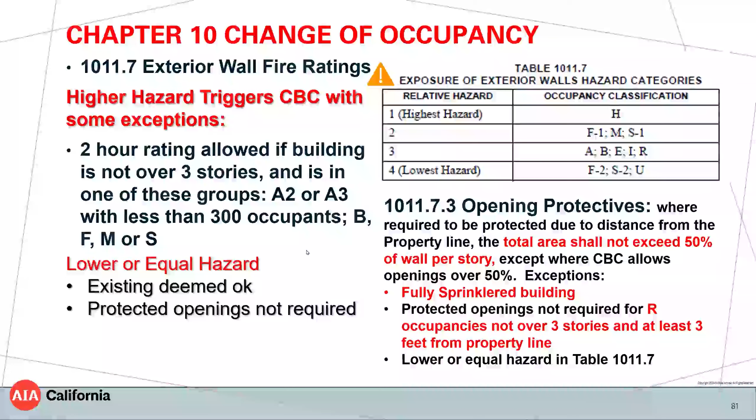There's a similar third table for exposure of exterior walls. And again, going from a B to an R here, there is no change. So what any office building can be used for R—existing is deemed okay, and protecting of openings is not required. So these are new standards.

And then you finally have the structural risk category that we already talked about. Most buildings are in category 2. There are some exceptions here based on seismic site factor—you can make some shifts. There are some restrictions on when you use storage or accessory occupancies or U occupancies, miscellaneous, and those are ones that, again, I'm not getting a clearer understanding from ICC of where those requirements came from, and they're not covered very well in the code interpretive manual. Those are all things that are currently being looked at.

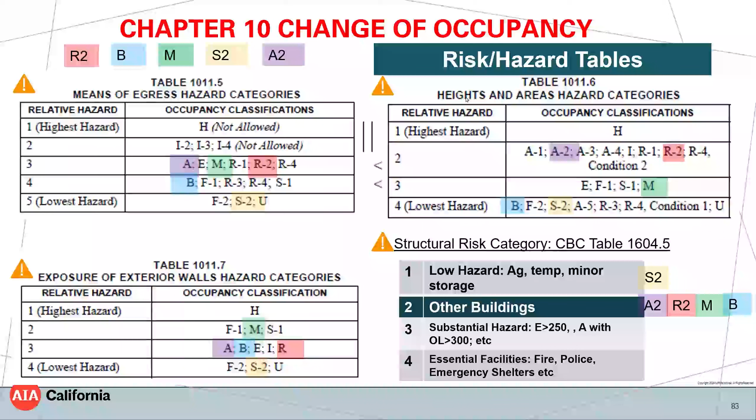But let me put this all together in one slide. Chapter 10 has these tables, so if you look at different occupancies—if what you're trying to do is R2, you can go from an A to an R2 and exiting is considered equivalent. You can't go from S2 or B to R2 without dealing with some egress requirements. Same thing with the other. Based on where we're at, I'm not going to spend any more time on that because you're going to have to look at it.

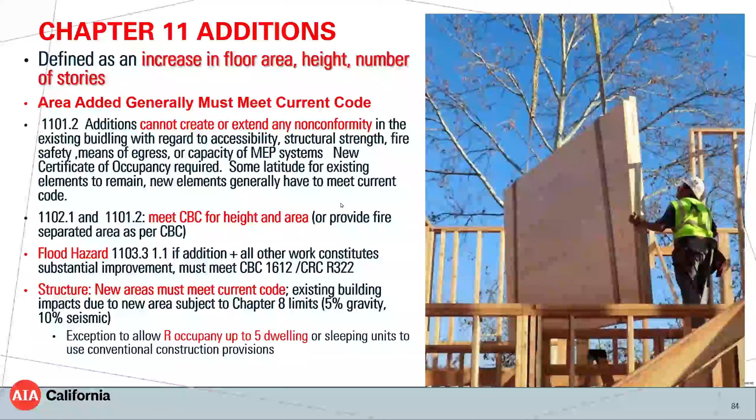If you do additions, when you add area, logically you must meet current code, and you have to be careful you don't create or extend non-conforming situations. You do have to check height and area. You have to consider flood hazard. Your new area has to meet current code for structure, and you have to make sure your new building doesn't put loads onto the existing building.

So I took all this material and put it into some checklists, because all these code issues fall into some categories. If you're using the CEBC, whether the prescriptive or the work area method, these are kind of my thumbnail summaries of what's going to be required and what the triggers are. And these are the issues: re-roofing does not trigger minimum slope or overflow—I cited that earlier. Passive fire protection: you have to look at risk levels.

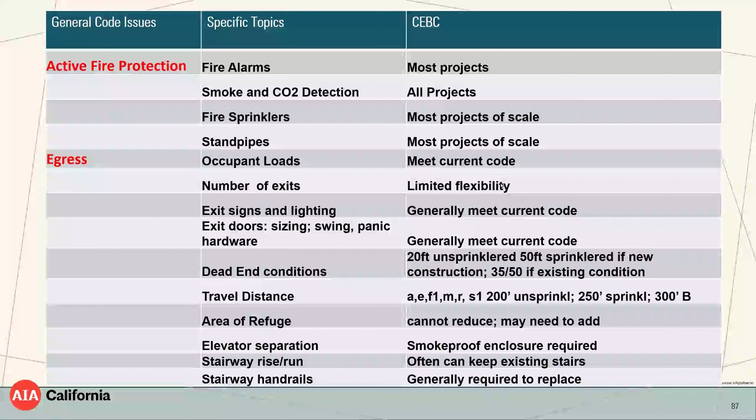Active fire protection is going to be required for most projects of scale. Egress, you pretty much have to meet current code in terms of your new occupant load, the number of exits—you have some limited flexibility in the code, and so forth and so on.

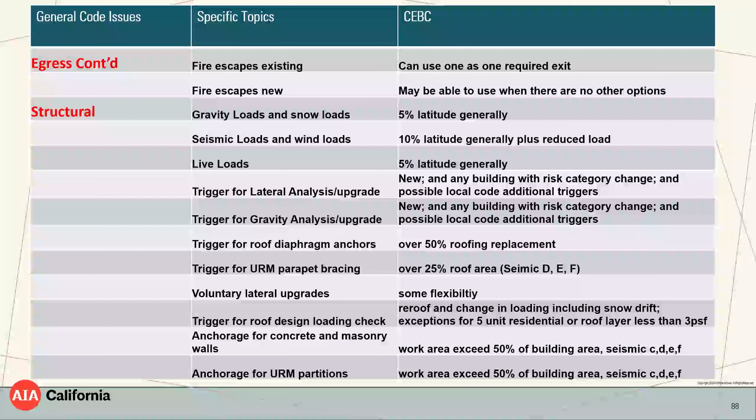You want to look at this in relation to your project. Maybe this is good as an early checklist, because if you're asked as an architect to look at a potential project, your challenge isn't to solve the problem in great detail right from the get-go. You'd spend tens of thousands of dollars doing that when there are a dozen things that could be deal killers. What you have to do is approach that project progressively, and logically look at the worst possible deal killers first and see if there are going to be triggers, because if they're going to kill the deal, why look further?

That leads me to this next slide. If you ask me, Mike, could an existing building project be considered new construction, which would mandate you having to use the California Building Code? Could that be triggered by some local code change?

Yes. And in fact, I found a survey done by this entity, Energy Codes and Standards—they're the people behind Energy Code Ace and have done such a great job. They're actually picking up the banner on embodied carbon, developing tools and resources to help make that easy for architects and developers to apply and understand. They did a survey of building officials. They didn't check every building jurisdiction, all 500 in the state, but they found that everybody's doing something different, unfortunately.

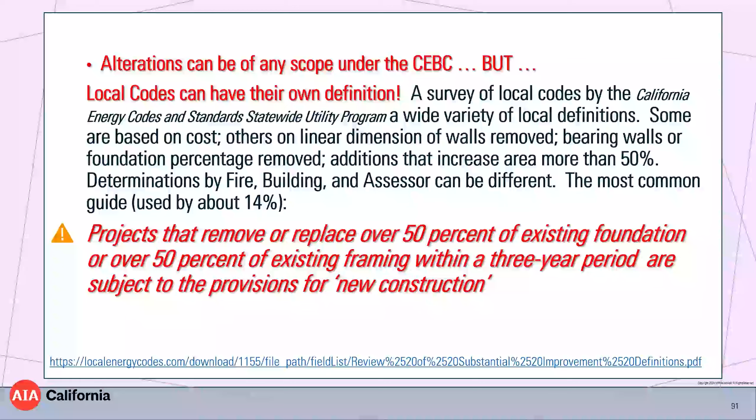There's a whole variety of definitions of how much project activity can occur before current code is triggered. They found the most common thing is 50% of existing foundation or 50% of existing framing within a 3-year period, but again, every building department is different. This is a challenge, and it's something AIA California is looking at, because one of our high-level objectives is greater consistency in the code landscape. When we get greater consistency, it's better for building departments, better for communities, better for the state of California, better for design professionals—it makes it so somebody can more quickly evaluate project opportunities.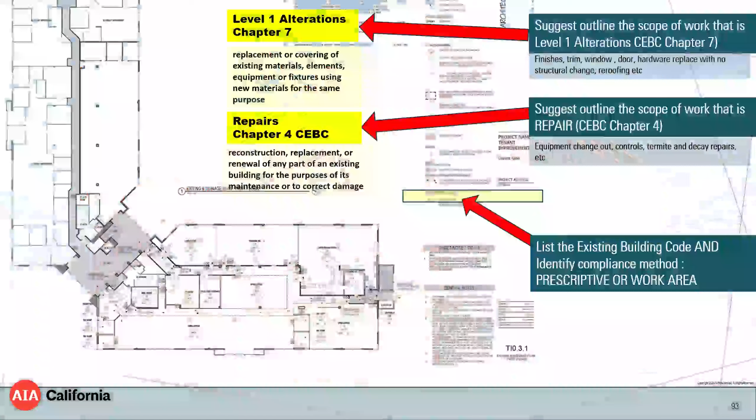So let's look now at some examples, as I go into the home stretch here, of what work area submittal documents look like. I think you have to actually say what code method you're using—that you're going to use the existing building code, and what method. You should probably put a narrative on the work that you consider to be level 1 alterations and chapter 4 repairs, because that helps the plan reviewer understand how to check the plans. So I think that's good practice.

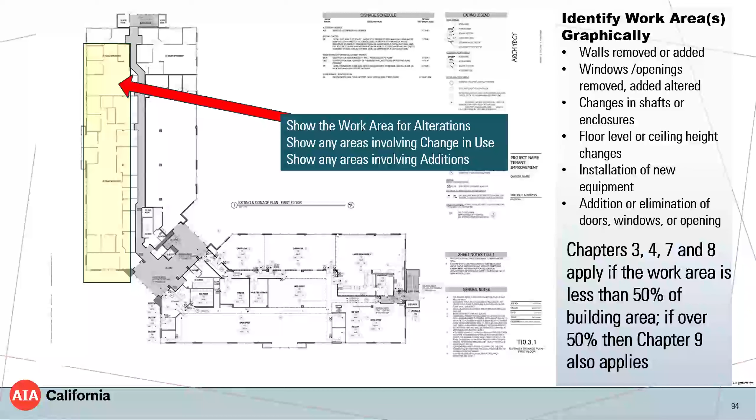You are required to identify the work area, and again, work area is very specifically defined, and I gave you a lot of examples. So if there is a work area, there should be a boundary and it should be clear. If that work area is less than 50% of the building area, it's going to be a level 2. If it's more than 50%, the whole project becomes a level 3 alteration.

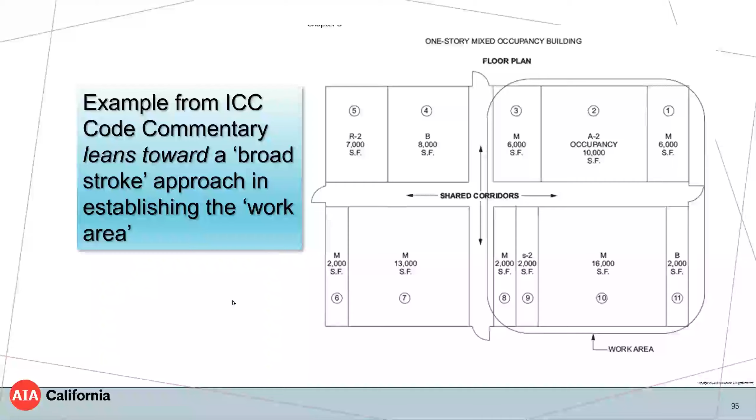The example in the ICC for work area is this really simple example, real simple diagram—probably easy for them to create this image. But work area analyses can be far more nuanced.

And I want to wrap up with some examples, real projects and imagined projects, of occupancy changes. Remember this drive to make it easier to do commercial to residential—it's a major mission. There was a law passed that required HCD to conduct hearings. The first launch of that effort occurred today, actually. I and dozens of other architects and code officials and people from around the state were on the call. There is a major effort to try and encourage more reuse of our obsolete, underutilized, and even abandoned commercial buildings for housing.

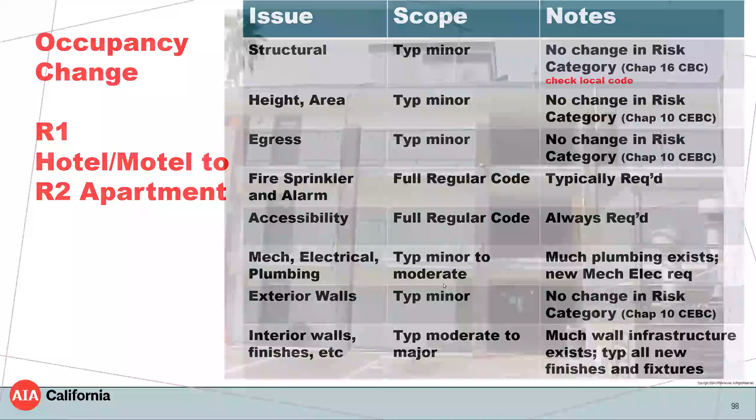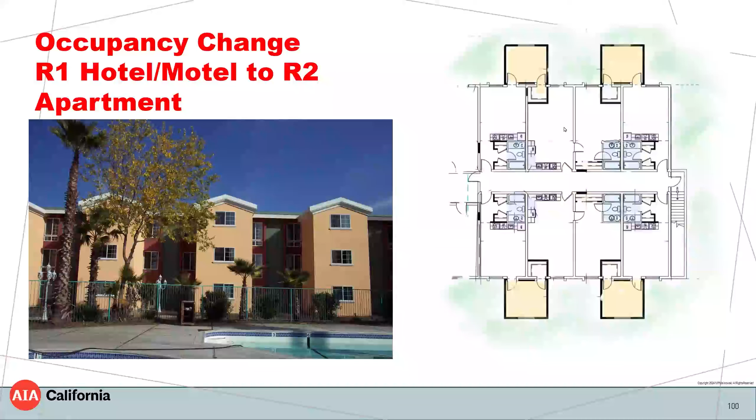These are real projects. Here's an example of a project I worked on where I made small additions, and for every 3 units, I created 2 living units. Here's another one that had about the same ratio.

How about when you go from assembly to R2? That's actually easy in some ways - some of the stuff has to come up to current code, like fire sprinklers, and some of it is going to raise infrastructure issues. Others, like height and area and egress, there's no change in risk category.

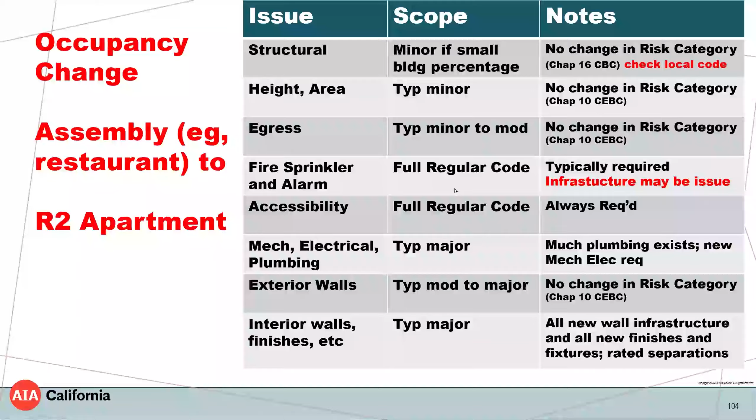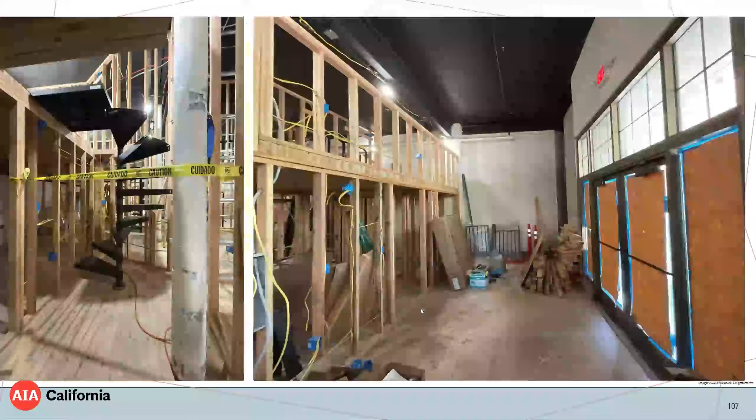Does this happen? Yeah, here's an example, one of my projects. It was planned to have restaurant on the ground floor, just a couple blocks from the arena. After 5 years empty with no takers, the developer decided he had to put something in there, so we put residential units in. It's under construction now, with units, even live-work units facing the street using the live-work provisions - a living unit plus an area that can be used by, say, an artist to display their work - because I had existing storefront that I couldn't change.

Now what about a change in occupancy from office or retail or warehouse to R2? That's going to involve more issues - you are moving up in risk category in a number of areas.

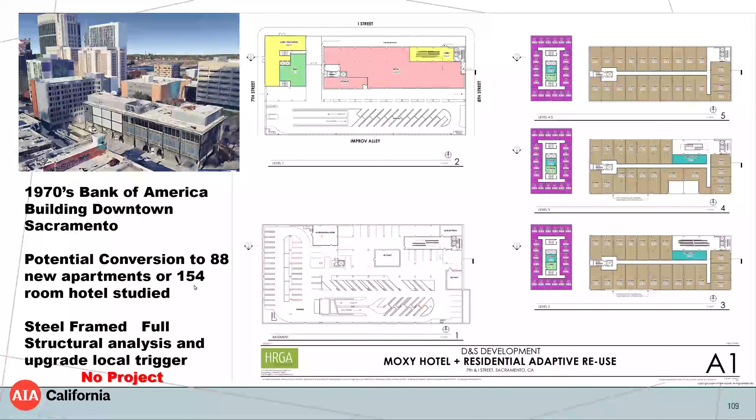This is an example of a project a developer talked to me about. It was built as a Bank of America in the 70s, a steel frame building. This project died - why? It's in the city of Sacramento and triggered a full structural upgrade, foundations to roof, every structural connection, all the foundation loads. Guess what use it is today after sitting empty for years and years? It could have been 88 new apartments or 154 hotel rooms. Instead it's office, with no structural upgrade.

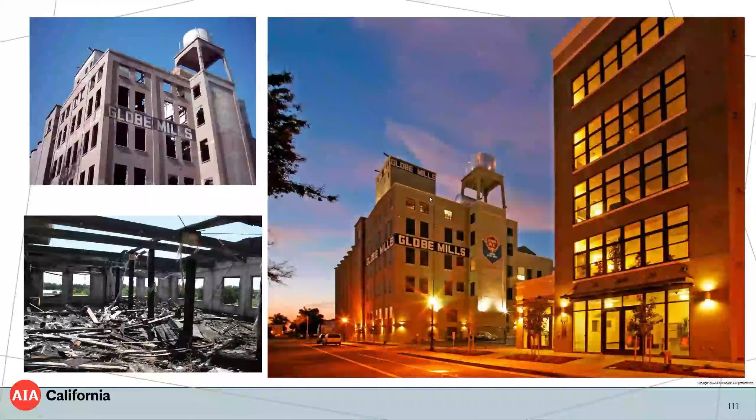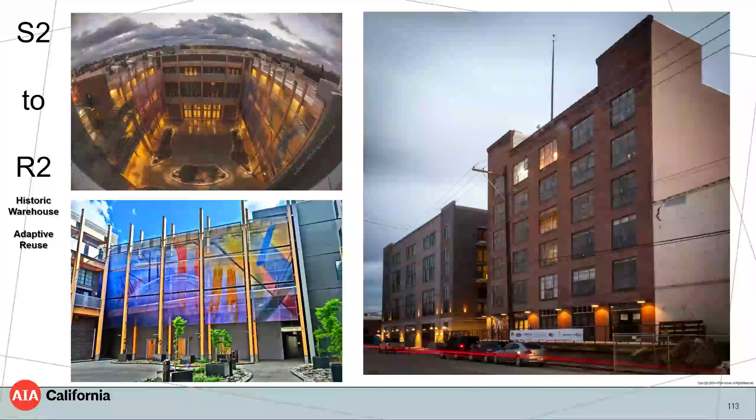It's a mixture of new construction and historic adaptive reuse, involving multiple AMMRs, but a beautiful project in Sacramento, an artist colony that has some lovely interior spaces. We need to see more of this work.

One of the architects I want to give real kudos to is Karin Liljegren - Karen always corrects me when I mispronounce her name, sorry Karen if you're on. She did this great little brochure that's on her website.

I just love this - it shows that every building has the potential to be housing. Every building. I know there's a scoring mechanism - there's a really large architectural firm doing work all over the world, and they can come out and do a score. They're doing it for Calgary.

One thing I was concerned about is buildings that don't score highly on this metric - they're providing funds to help tear these buildings down, as well as funds to help convert the ones that do score well into housing. Well, tearing those big buildings down is a huge negative move for the climate - it's a disaster from a climate change standpoint.

Sure, they're tough, they may not have the right depth-to-ratio, but there are a lot of clever solutions. Here's one of a 54-foot deep unit that has shared borrowed light through multiple layers and lovely interiors, and this could be used on a lot of these buildings that score poorly.

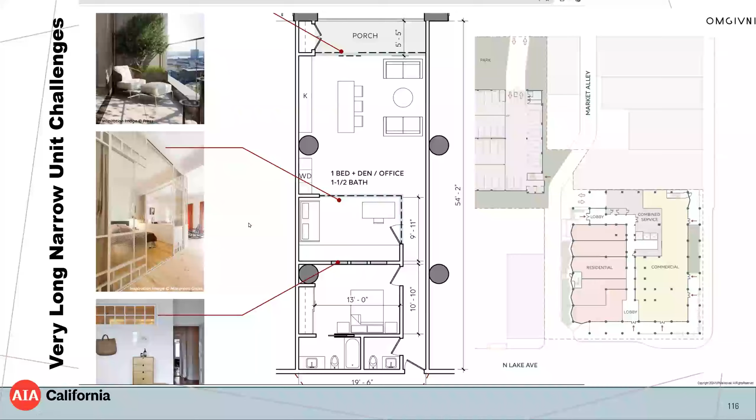Here's a little strip mall with underground parking in downtown LA, and Karen and her team did a design study showing how these can be turned into really cool live-work units, using the existing structure just the way it is.

Same thing with a partially empty building, or a building that has a use like parking on the ground floor, where you can put street-facing live-work units on the ground level. Taking advantage of this could be done literally anywhere in California based on my read of the current provisions for live-work in the CEBC.

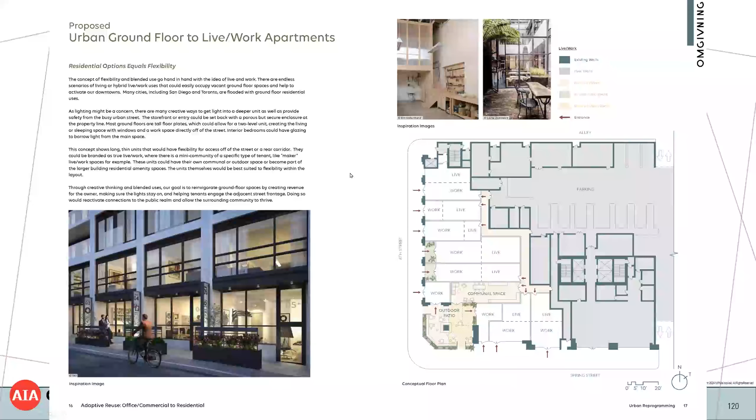The provisions in LA are even more aggressive and liberal than those in the regular code. Another example shows how you can take a really big footprint, an old Kmart or some big box kind of building, and cut holes out in the center to bring in natural light and still create viable units. This is an issue being talked about all over the country.

There are studies being done, and the White House is working on this. There are communities, like I mentioned, Calgary, and Governor Newsom is taking vacant state buildings and already working on converting them. Calgary has a very aggressive policy. I think it's maybe a little off track in terms of subsidizing building demolition, which is premature when we're still evolving the tools and techniques for these kinds of projects. It's a moving landscape. There was a meeting today of a working group looking at California codes to encourage and support this type of work, and there's a national ICC working group I'm on that's looking at these kinds of projects.

And that's my final slide. I apologize, I haven't been watching the chat at all, I've been totally focused. We've got a few minutes left for those of you who aren't totally exhausted at this point with a nonstop barrage of words and images. So I'm going to look and see, I see there are some things in Q&A, so we'll take a few minutes here.